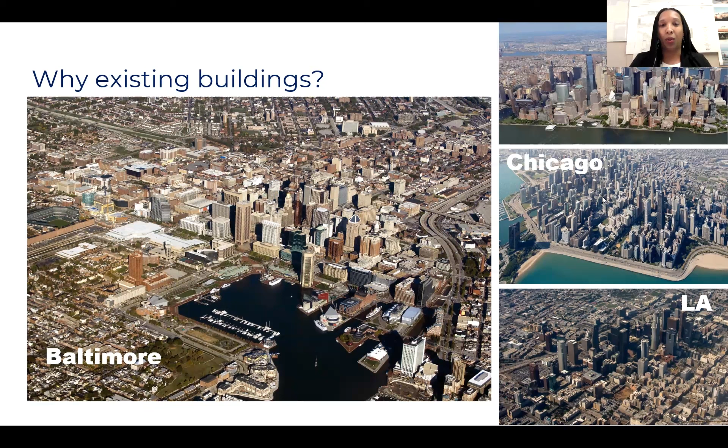And so here are a couple different aerial views of different cities just to give you a sense of how much is there. And we really need to deal with both the tall buildings, the mountains, as Nazria calls them, and the carpet buildings, which are the lower scale buildings. There's so much here for us to work with.

Two quotes that I often think about are the greenest building is the one that's already built, which is credited to Carl Elefante, FAIA, who is one of Quinn Evans' principals emeritus. And so he was a big shaper of Quinn Evans' sustainability ethos when he was here. And the other one is that building reuse is climate action. And that's a shout out to Lori Ferris, who's one of the co-chairs of an organization I'll talk about coming up.

So one of the reasons why it's super important for us to deal with the existing buildings that we have is because by 2040, 2/3 of the global building stock that's here today is still going to be here and exist. And so without upgrades to any of these buildings, they're still going to be emitting greenhouse gases. It's still going to be contributing to a lot of the climate change issues that we're having.

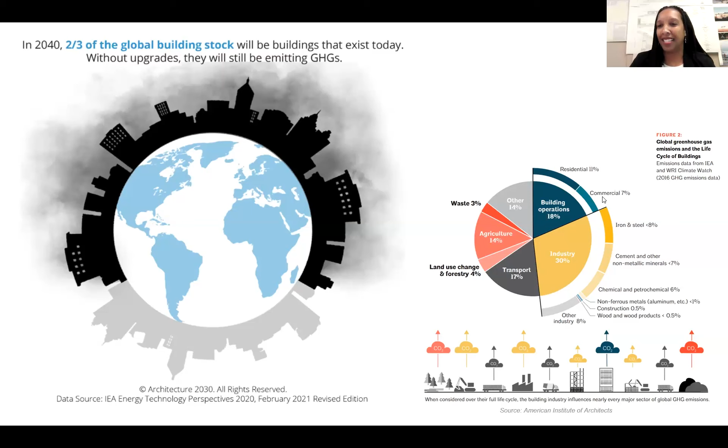And for those of you who don't know this, there's a great stat on the right that kind of shows how building operations and building materials impact greenhouse gas emissions and what that all looks like. I'm sure at this point I'm preaching to the choir, but wanted to make sure I put this in for some level setting just in case there was anyone who was not thinking about existing buildings in this climate action situation.

And so one of the things that I found going through my education and my career is that there have been a lot of silos. So a lot of times the preservation folks are only talking to preservation folks. Architects tend to only talk to architects, and the sustainability folks sometimes only talk to the sustainability folks, not realizing that we really need to be working together because we don't have time to duplicate efforts and not be in communication.

And so one of the organizations that was founded in 2017 is the Zero Net Carbon Collaboration for Existing and Historic Buildings, also known as the ZNCC. We know it doesn't roll off the tongue as well, but it's a great organization. And the organizations that are highlighted in purple are on the steering committee for ZNCC. And what we do is we really try to have conversations across silos, across industries to help see what's happening across the world, across the industry, so that we can make sure that we are able to share best practices.

And I'm one of the co-chairs of the organization with Lori Ferris, Scott Henson, and Charlie Crane. And it's been a really great way to be able to communicate across the industry to keep talking about what's going on.

And so one of the things I wanted to also level set in this conversation is the fact that there are different types of existing buildings. The scale of preservation slides a little bit. And so an existing building is any building that is constructed and or has been occupied at some point, or perhaps it's just constructed and waiting there.

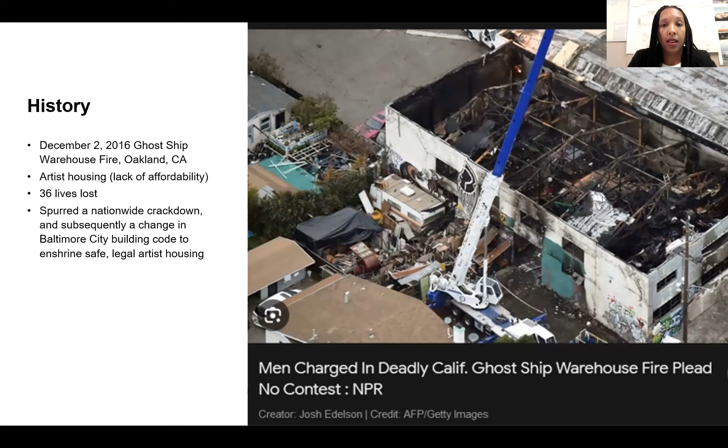But it did not address the fact that there's still a lack of naturally occurring affordable artist housing, and a lot of artist collectives are popping up for survival. And so our first interaction with this client was through working with them on another one of their properties, updating their sprinklers and proper egress paths to make sure that people living in their cooperatives would also have safe access. And so when they decided that they needed to do another project, they came back to us, and that was a fantastic way to continue that relationship.

And so a little bit of background on Baltimore. For those of you who don't know, Baltimore has had a steady decline for a number of decades, partly due to a lot of discriminatory lending, as well as urban renewal and other things that a lot of other legacy cities are dealing with. We have had about a 33% population decline from its peak. And because of that, Baltimore has a lot of vacant housing stock, but we still have a shortage of affordable housing. But one of the great things about Baltimore is that a lot of our building stock is still here. It hasn't been demolished yet. And so optimistically, there'll be a lot more renovations happening so that these buildings can be rehabbed and not demolished, and so that the historic fabric of the building and of the city can be maintained.

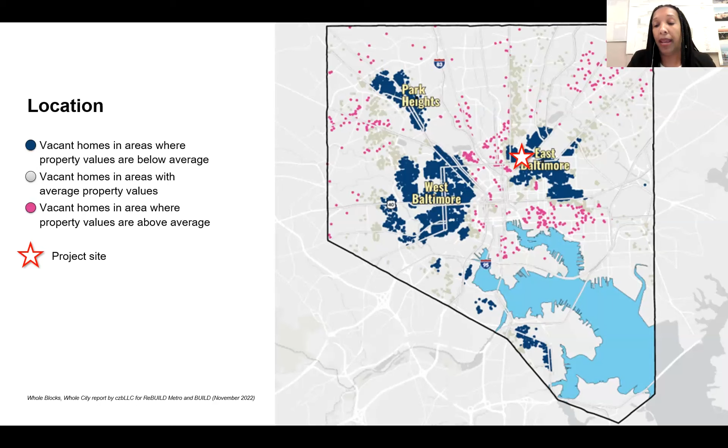Baltimore is known for something called the White L and the Black Butterfly. The White L is this area kind of downtown to Inner Harbor, and then the Black Butterfly are the areas typically in East and West Baltimore. A lot of that goes back to the redlining maps and where the mortgages and investments were allowed to be made and other systemic racist issues. But all that to say, the client purposely has a project located in an area that has been disinvested. And based on their mission, they wanted to make sure that they were able to bring something to this community that was going to show another way, another prototype for how to build.

And so they had 4 underutilized historic row houses on their property. These are historic, but not certified historic, just to point that out. But they did want to keep with their mission to reuse as much as possible and keep the neighborhood character intact. And so because of that, we needed to insulate on the interior. They also knew that they wanted to make it a high-performing building, because they knew they were going to be long-term stakeholders in the community.

And so this building is going for Passive House, as I mentioned, and it's been interesting because of the different ways that things are classified. It's 4 row houses that are being combined into 2. And so one of the things that we had to work through was, it's considered 1 unit for one rating system, and multiple for another. And so some of the green rating certifications have been a challenge that New Ecology has been helping us through.

And due to the deteriorated structure, we knew we needed to maximize the number of rooms that were available to be affordable housing. And so we inserted a new structure inside of the existing shells and then created the addition above and behind the volume. And so this really is acting as a building within a building, and the new structure is providing the framework to apply the passive principles, as well as insulating the shell and the continuous air barrier.

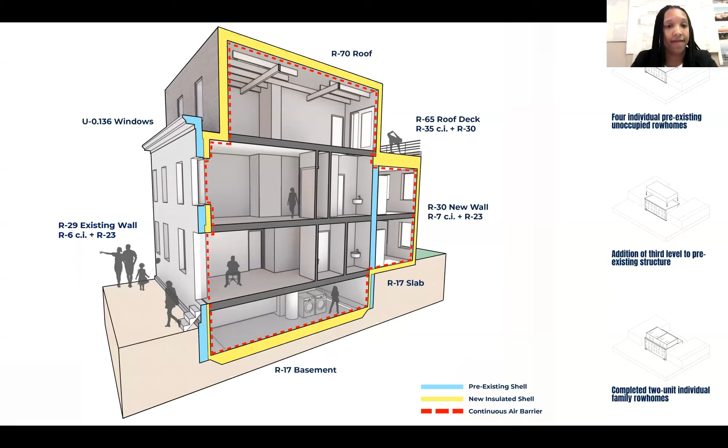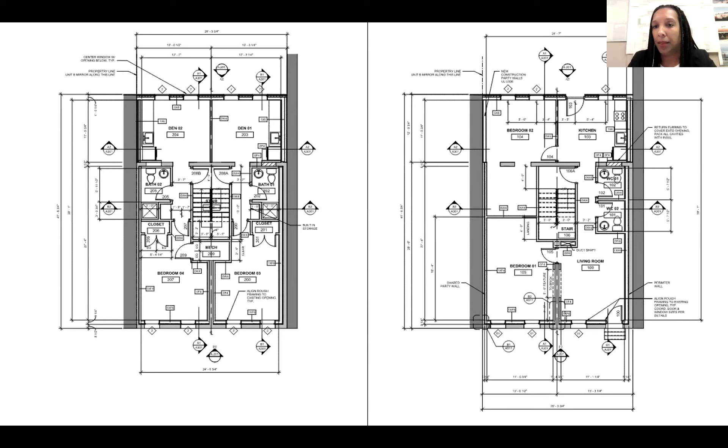And then the 3rd floor hosts a recording studio and a rear roof deck. And we have really simple, flexible interiors throughout this one. So since Quinn Evans served as both the architect and the CPHC, the design process was pretty seamless. We were able to focus on the challenges for the interior side of the masonry retrofit and identify many of the critical junctions. And so it's been great to really hear from Dave some of the issues that they went through, and also a lot of the ways that they worked with Phius to work through some of these.

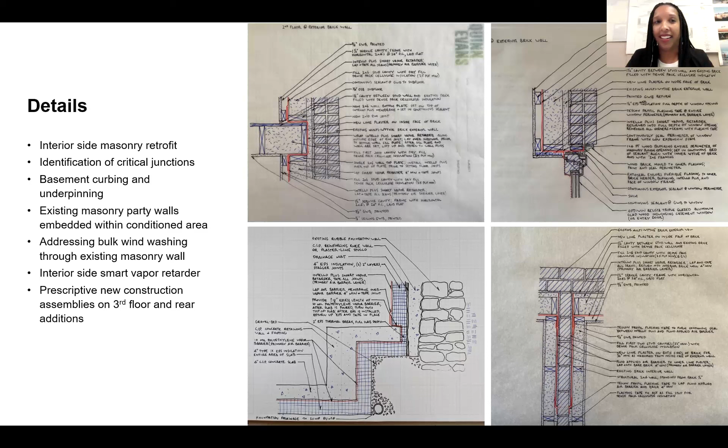On the interior of the existing masonry structures, they made sure to install a service cavity, which you can see in this detail here, really to protect the air barrier and to provide ways to improve the connection there. Go to the next one. We also worked with Phius a lot on this one.

Here is kind of the screenshot of some of the supporting documentation and the back and forth of some of the modeling. I've been told that the first attempt to pre-certify was a little bit mixed, but there was a major focus on thermal bridging and hygrothermal analysis. And so New Ecology was able to work through a lot of the calculations with Dave, and they realized that the thermal bridging calculations for the existing masonry walls kind of performed as expected, and it wasn't as major of a hurdle as many people were expecting.

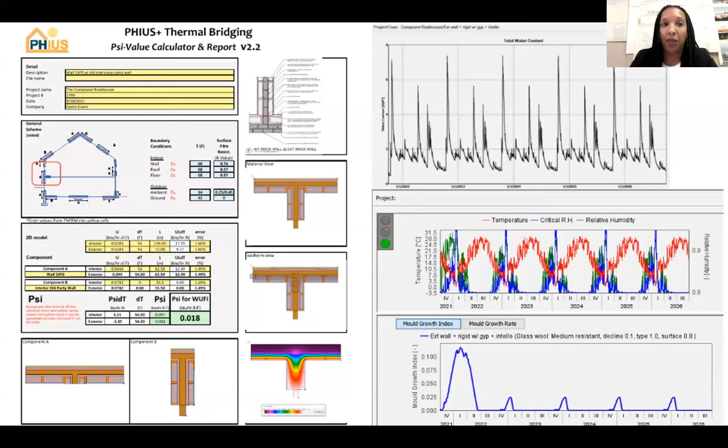But they did say that finding a retrofit assembly that was able to provide enough insulation and meet the heating and cooling demands and be durable and dry was a little bit challenging. And so they worked with Phius to act as a consultant and provide more of that hygrothermal modeling to come up with different solutions. And so a lot of that ended up being resolved.

Some of the things that got refined through that process was the realization that they needed to also insulate on the party wall. So here's the exterior front wall, and then this is the party wall that existed between some of the units. Even though this was technically an interior wall, they still needed to insulate back almost 3 feet to minimize the thermal bridging from here, and then insulate on the inside of that wall. And by working with Phius, they were able to determine a safe path forward using a modified version of the various retrofit assemblies so that the insulation was less moisture sensitive.

One of the other highlights on the detailing was giving the contractor, particularly since the client was self-performing, more details on the process for what needs to happen. One of the detail items I pulled out was this step-by-step of wrapping the Intello Plus smart vapor retarder along the outside edge of the rim joist, then laying over the subfloor prior to setting the wall and sill plate, and then after the sill plate and wall was set up, lift up and fasten to the wall stud.

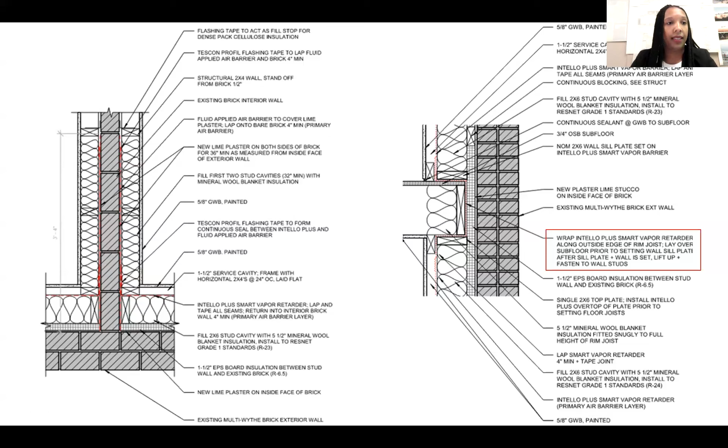So sometimes providing a little bit more detail like that on the architecture side can help the contractors install things correctly. There's a fine line between not getting too much into means and methods, but with passive projects, there has to be a little more detail and communication to make sure the contractor can construct it correctly. From there, the building was design certified and proceeded to the construction phase. There were lots of details, and we can get into some of this in the Q&A, but I just wanted to show some highlights of the information that was provided.

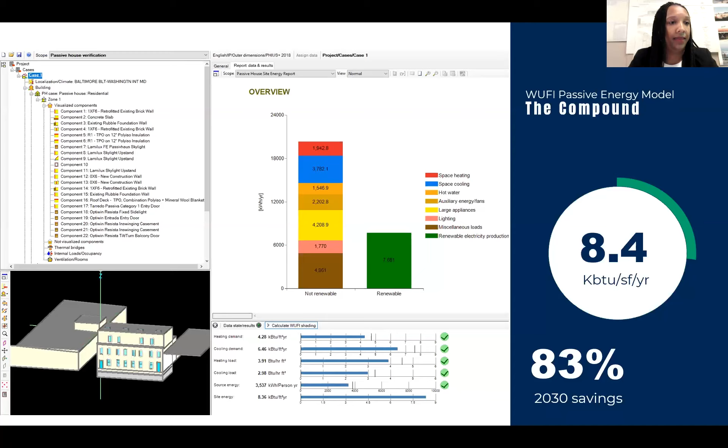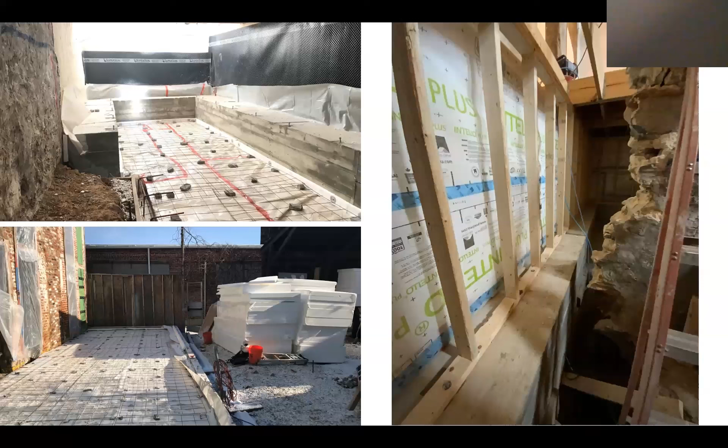Here's a photo of the construction of the new concrete underpinning at the basement, as well as the slab on grade for the rear additions that was happening. And then just seeing how the shell within a shell was being constructed.

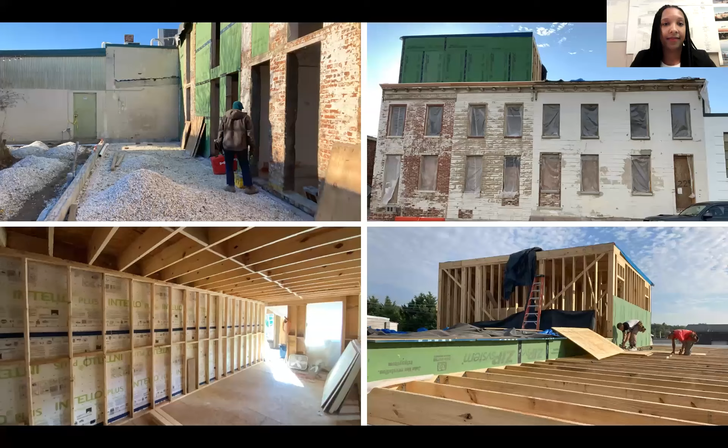Here's a photo of the pop-up on the roof, showing how it's set back a little bit from the cornice line. And then on the bottom left, it's showing the air barrier on the party walls, because there really was an attempt to try and compartmentalize each row house. And then being able to still complete the framing and work within the existing buildings.

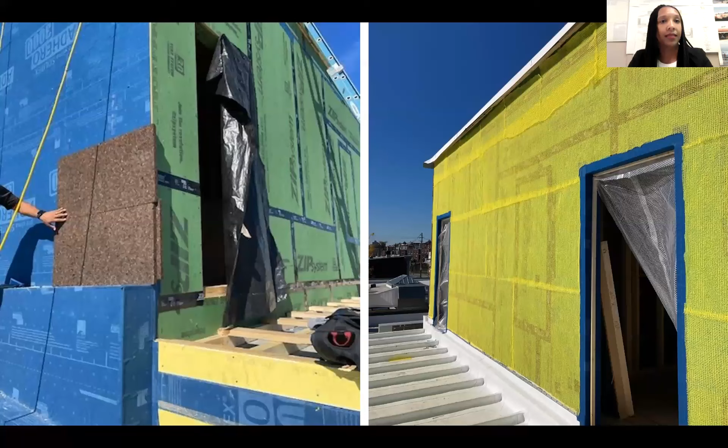So one of the fun things about this project is that the exterior finished material also helps to serve as insulation. Thermocork is the exterior material that's used on the pop-up portion and the rear of the building. And then the right side is the yellow drainage plane that's put on before the thermocork was actually installed.

One of the sometimes frustrating things about working with an existing building, particularly when you're trying to pass your blower door test, is that sometimes it takes a little bit of chasing to find where the gaps in the air barrier are. For this one in particular, there seemed to be much more issues with trying to get the detail behind the wood cornice airtight. So there was additional insulation and additional detailing provided to make this work so the blower door could actually be passed.

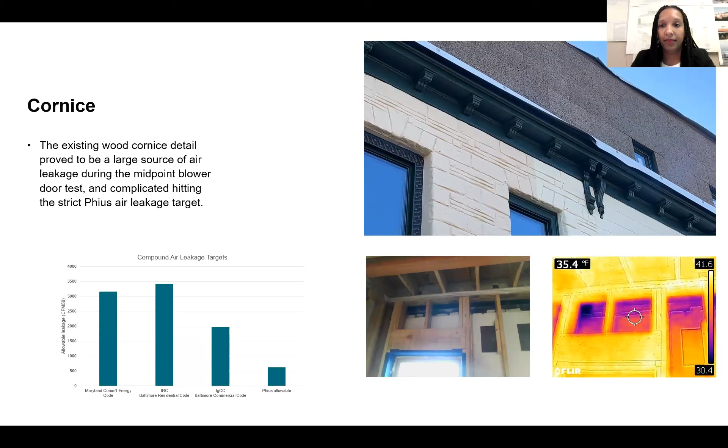Oh, there you go, a little video. And, oh, sorry, one second.

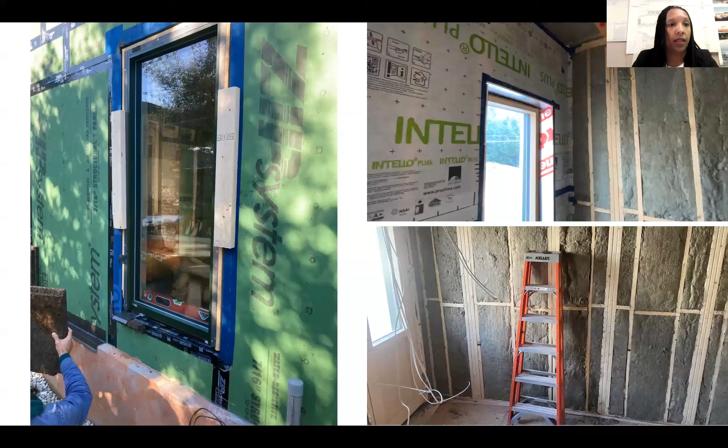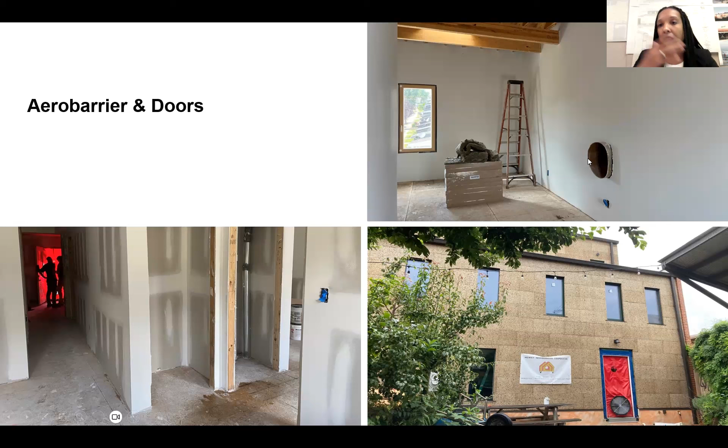So back to air barrier and blower door. Despite all the different detailing, air sealing, all the targets and things like that, they still did have to go back with AeroBarrier to be able to hit the targets needed. And for reference, the 4 buildings got combined into 2 row houses, but for the blower door test, they were 1 blower door. On the top right, that's the connection between the units that actually makes all of the air ventilation work.

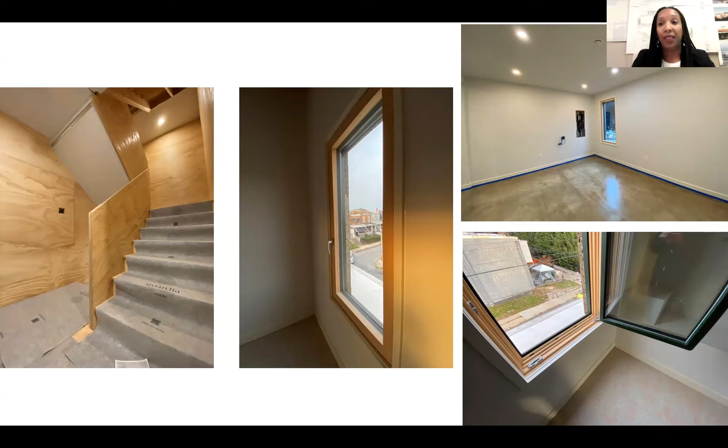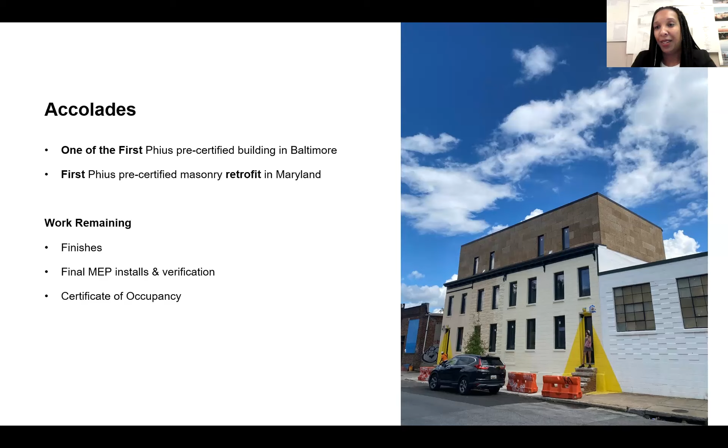And so we've got to talk about some of the accolades, of course. We are one of the first Phius pre-certified buildings in Baltimore, and also the first Phius pre-certified masonry retrofit in Maryland. The building is not occupied yet. It's almost done. They are now down to the finishes, finishing the MEP installs and verification, and then they'll get their certificate of occupancy. That was a very high-level, quick view of the project.